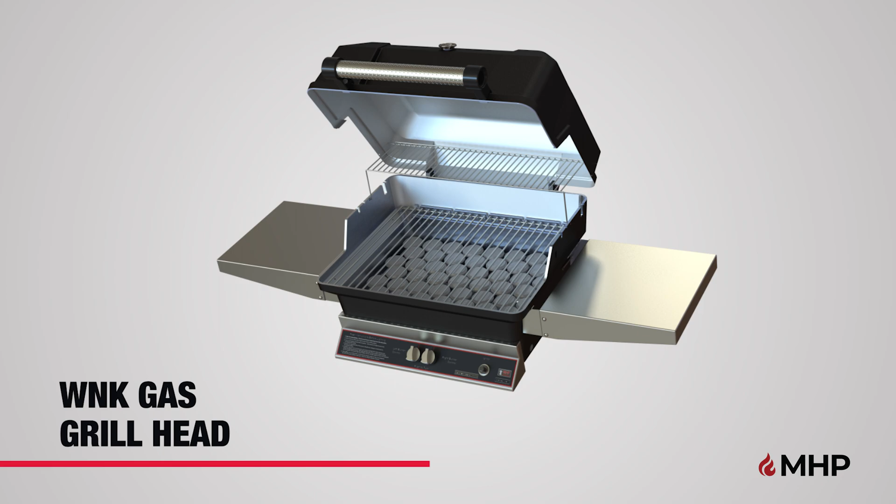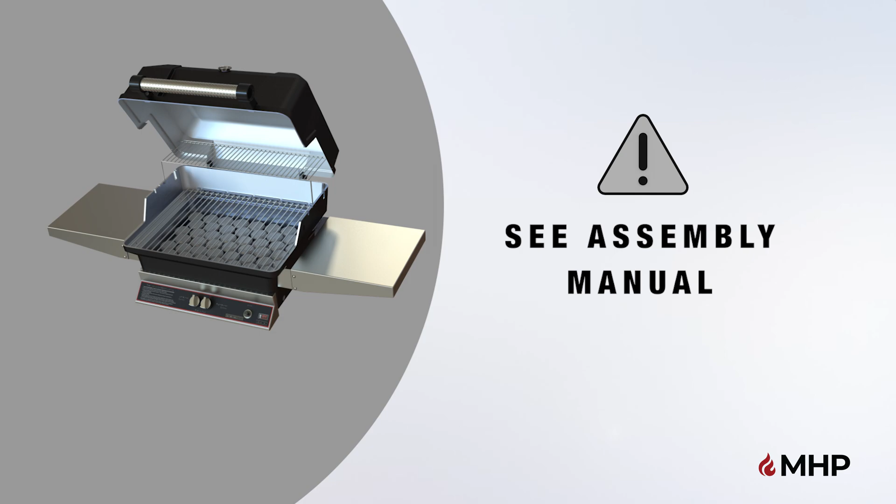Your new WNK Gas Grill comes with either stainless steel or SearMagic style cooking grids. Before you begin the installation, please make sure to read the assembly manual thoroughly, as it contains important safety warnings and assembly tips.

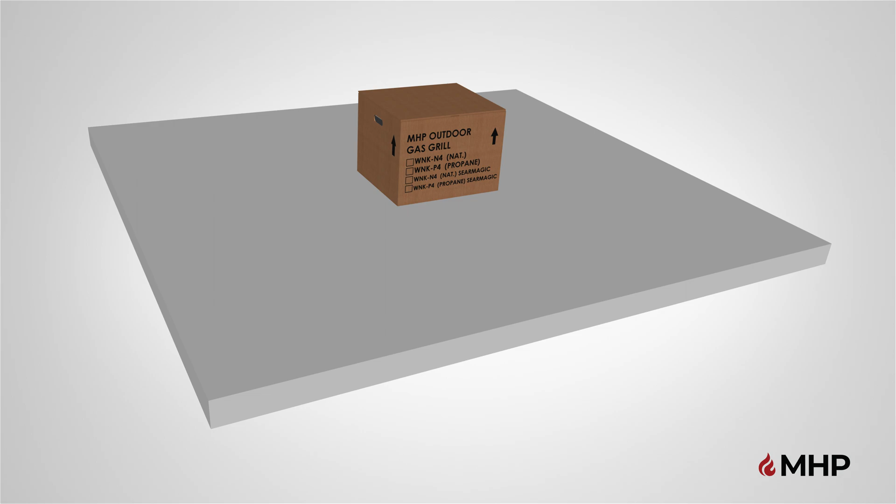Unboxing. Begin by selecting an area where you are going to set up your grill. Make sure there is enough room, and you have a flat surface. The appliance is for outdoor use only. It is not to be used inside a garage, other building, or any type of enclosed area.

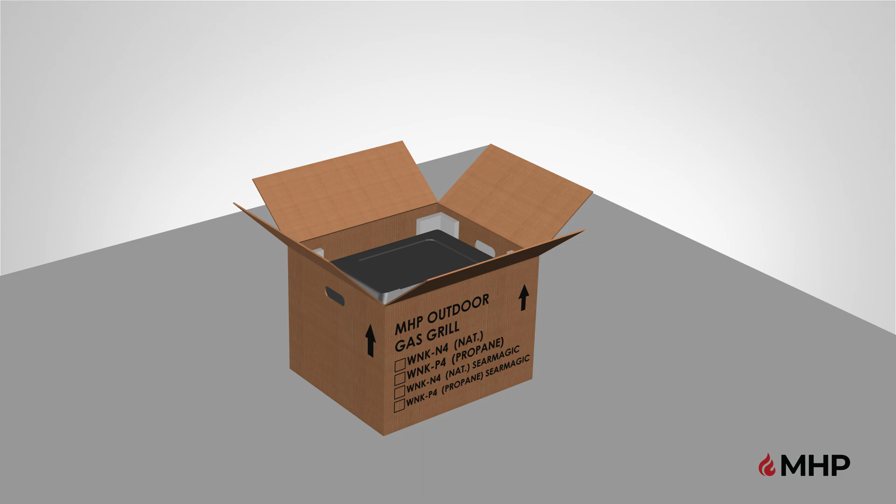With some assistance, place the WNK box facing out. Next, remove the packaging material followed by the grill head components. Slowly remove and set the components aside on a flat surface. Once all components are removed, you can discard the box.

Please note, combustible materials should never be within 18 inches of the bottom, back, or sides of your MHP grill when in use.

Unboxing is now complete. Step 1: Installing the control panel. For this step, you will require the following parts, and the following tools are recommended for this step.

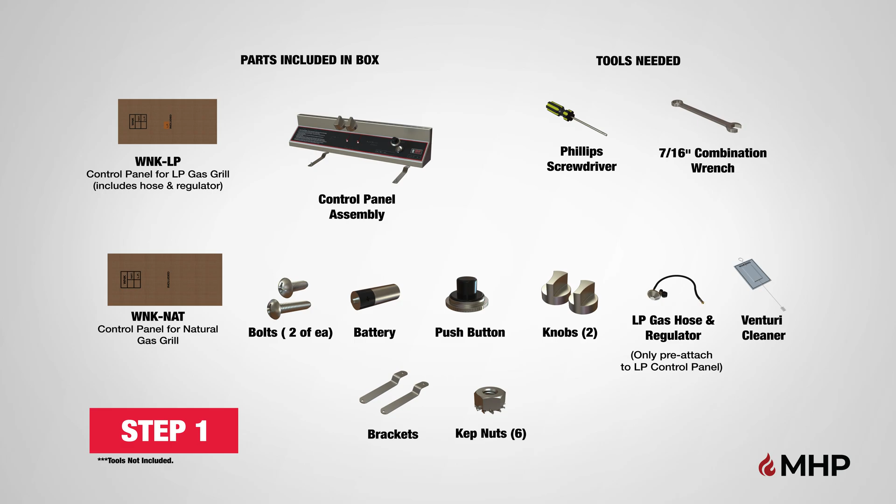Begin step 1 by locating the bottom grill casting, which has the burner pre-installed. Removing the burner is required before the grill casting can be installed on an in-ground or patio-based post. You may find that removing the burner will make it easier to mount the grill casting to the other mounting options, but it is not required.

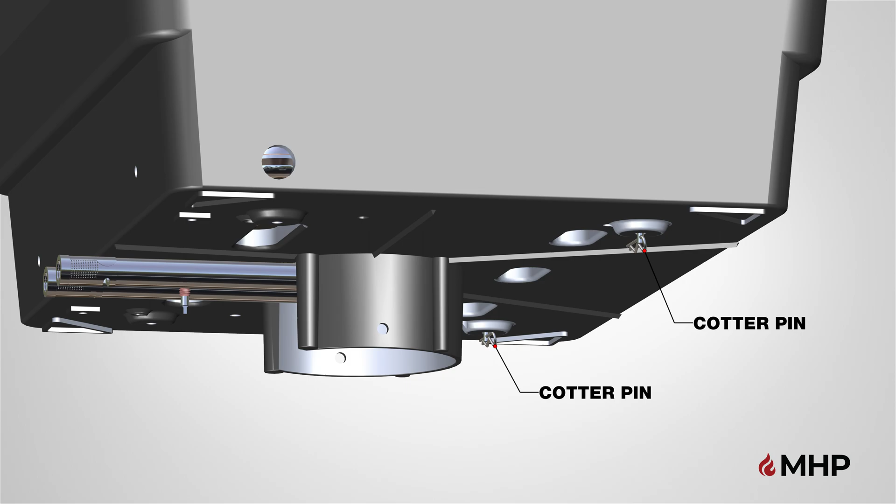To remove the grill burner, start by removing the two small cotter pins located on the underside of the bottom grill casting. Pull out the pins and place them aside for now. Next, pull the burner up and out of the grill head as shown.

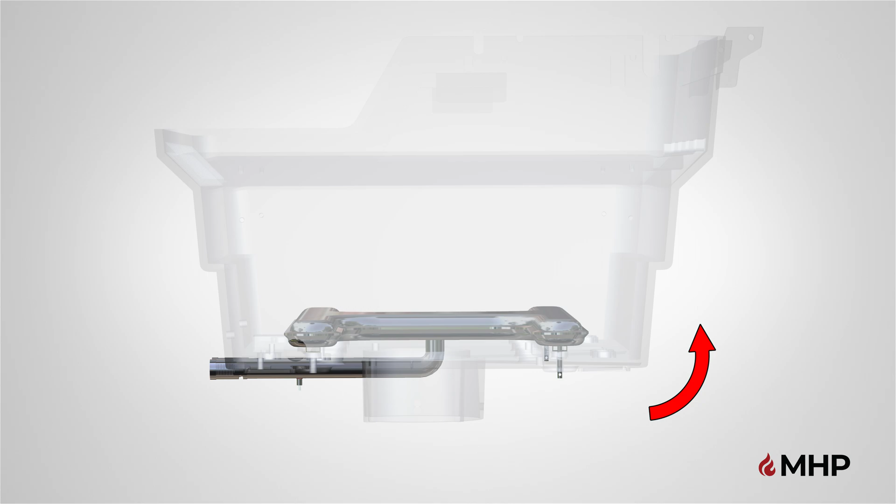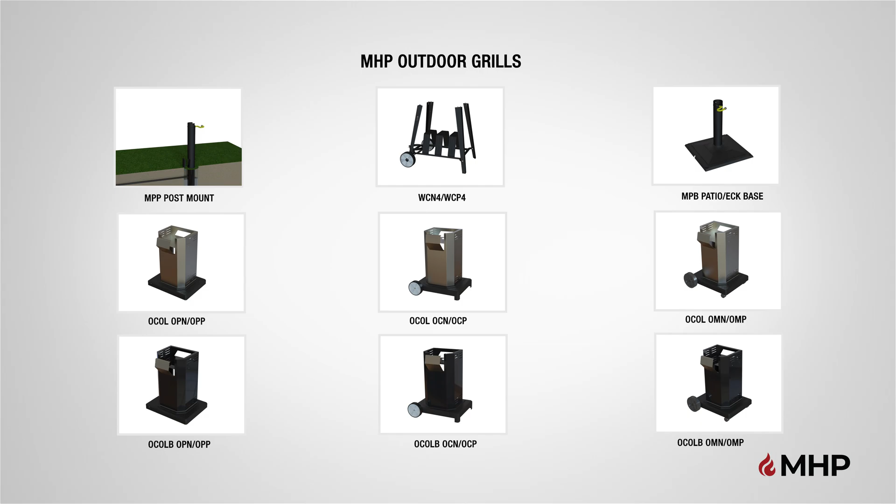After removing the burner, you may proceed to mounting the bottom grill casting to your selected grill base before installing the control panel. Please reference the assembly manual that came with your grill mounting for directions on how to mount the bottom grill casting, as well as how to properly connect the gas supply to your grill.

After mounting the bottom grill casting, locate the control panel and attach it to the front of the bottom grill casting. Please note that if your grill is configured for LP use, the hose and regulator have been factory installed onto the LP valve. Slowly push the control panel into place, matching the inner bolts of the control panel to the bottom grill casting holes.

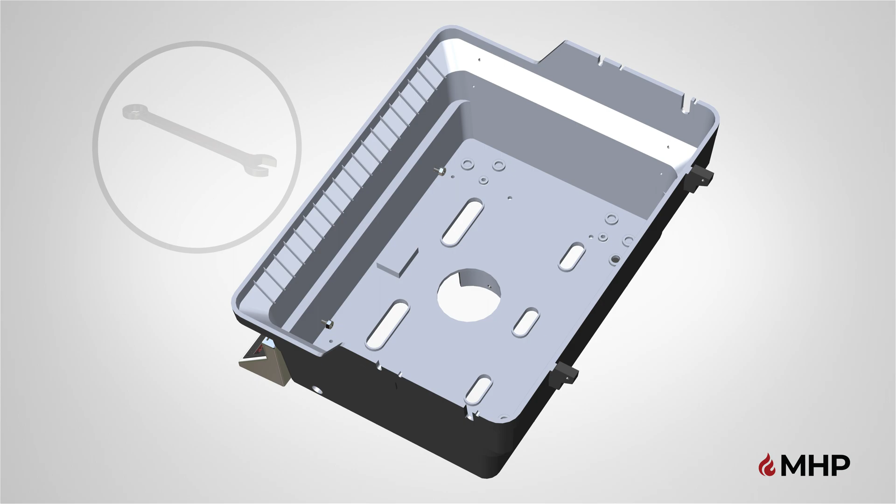Using two KEP nuts, secure the bolts through the inside of the bottom grill casting and hand tighten. Fully tighten the nuts using a 7/16" combination wrench.

Next, locate the bottom of the control panel and attach two support brackets. The support brackets attach to the control panel and to the bottom grill casting. The two front holes use a 1/4 by 20 by 1/2 inch Phillips head bolts, and the two back holes use a 1/4 by 20 by 1 1/4 inch Phillips head bolts.

Push the brackets into place, and starting with the back holes, insert the 1/4 by 20 by 1 1/4 inch Phillips head bolts through the grill bottom casting from the inside. From underneath, hand tighten the two KEP nuts onto the bolts.

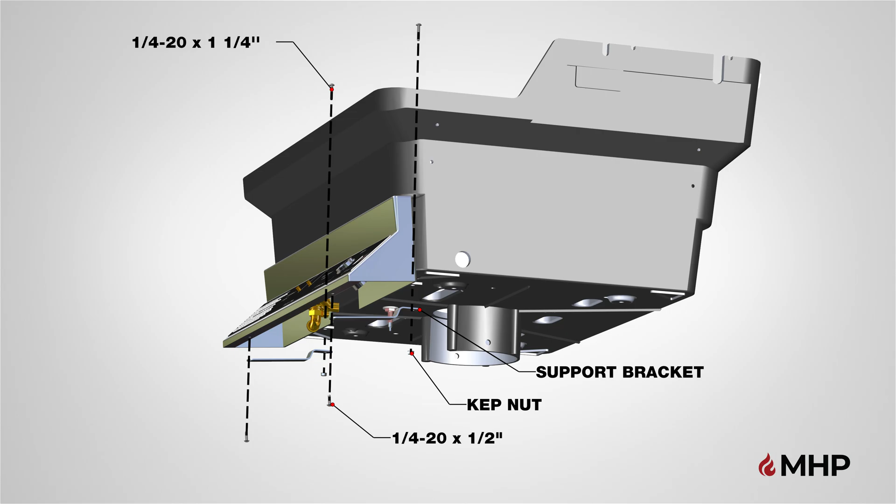Fully tighten the nuts onto the bolts using a 7/16" combination wrench and screwdriver. The screwdriver is used to hold the bolt head and the combination wrench to tighten the KEP nut.

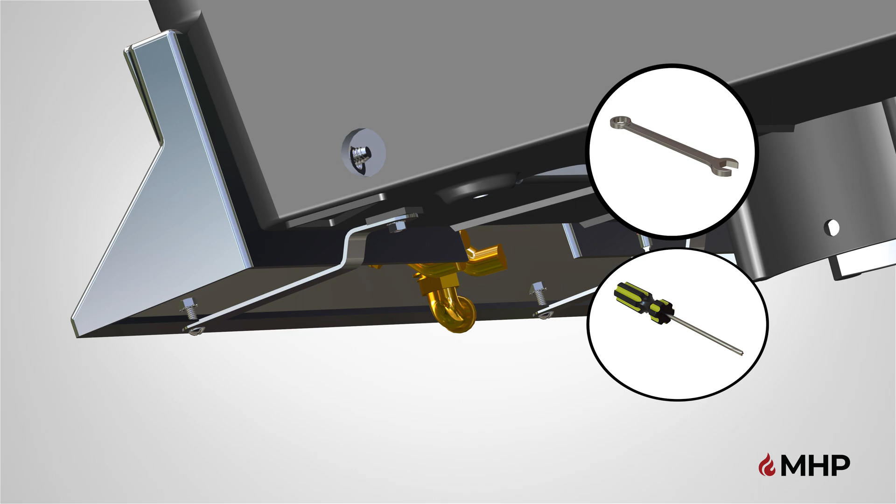After the back bolts are secure, proceed to securing the two front bolts by hand tightening the two KEP nuts onto the front bolts from underneath. Fully tighten the nuts onto the bolts using a 7/16" combination wrench and screwdriver. Again, the screwdriver is used to hold the bolt head and the combination wrench to tighten the KEP nut.

Next, locate the burner, and drop the burner into the bottom of the grill casting, making sure the venturi tubes go through the bottom opening. Slowly guide the burner and venturi tubes into place, making sure the back leg pins go through the pre-drilled holes in the back of the bottom grill casting.

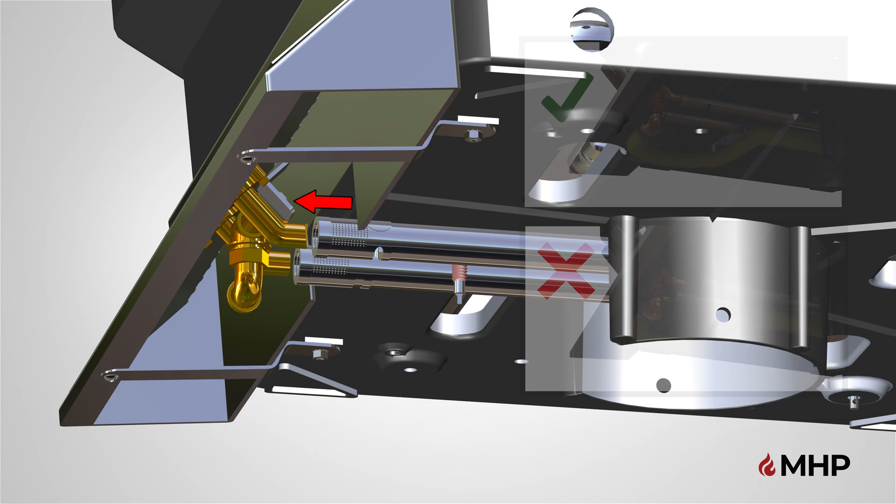Make certain the valve stems located under the control correctly engage into the burner's venturi tubes. When properly installed, the valve orifice should fit into the venturi tubes between 1/4 to 3/8 inch.

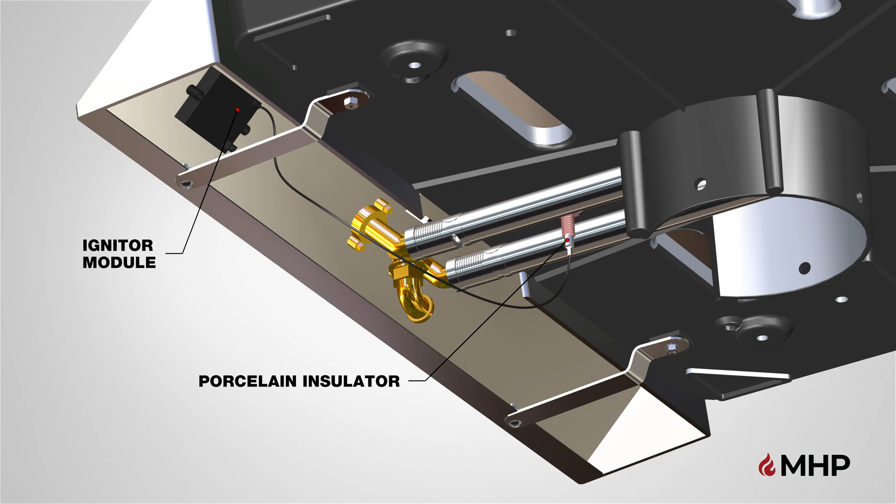Once the burner is in place, reattach the small cotter pins onto the burner leg pins underneath the bottom grill casting. When the burner is properly installed, proceed by attaching the igniter wire connection.

Attach the wire from the igniter module, located behind the control panel, to the porcelain insulator found on the underside of the bottom casting between the venturi tubes. Be careful not to crack the delicate porcelain insulator when attaching the wire.

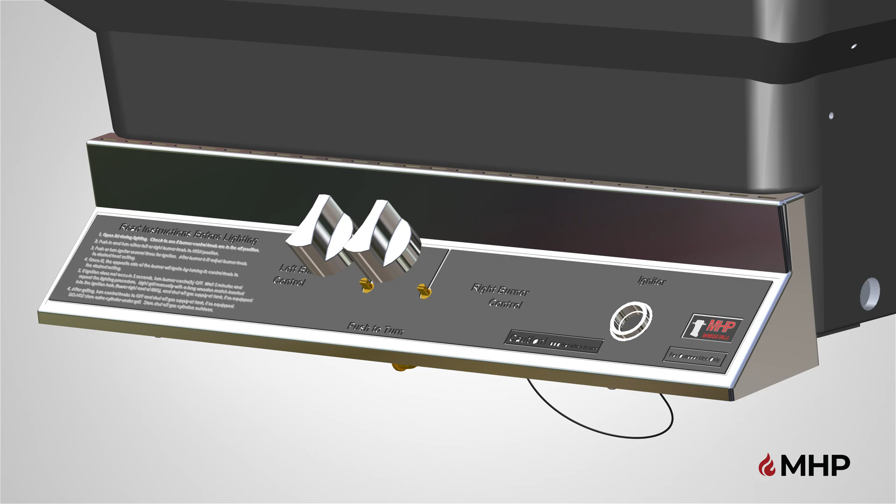Next, locate the control knobs, and attach the knobs to the control panel. Attach the two control knobs to the grill by pushing them down securely onto each of the valve stems.

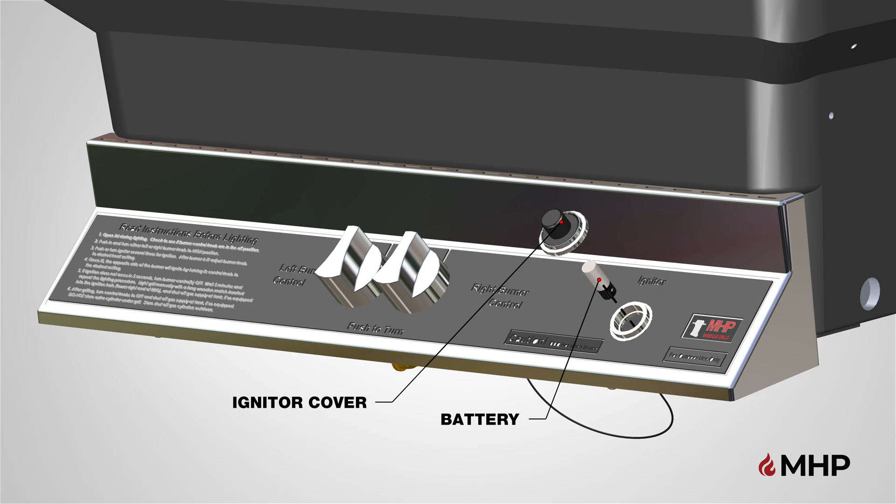Finally, place the AAA battery, with the positive side facing down, into the igniter module. When the battery is installed, attach the push button over the battery and turn clockwise to tighten in place.

Step 1 is now complete.

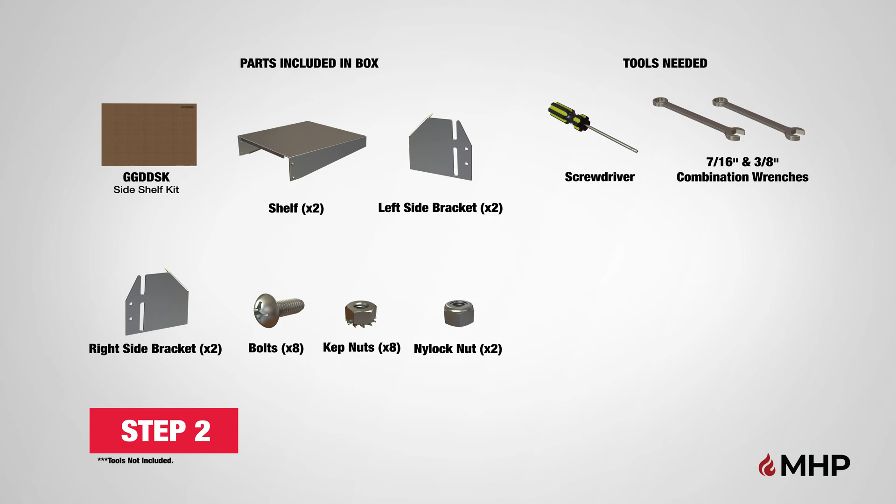Begin step 2 by first removing the plastic protective sticker from all sides of the shelf and shelf brackets.

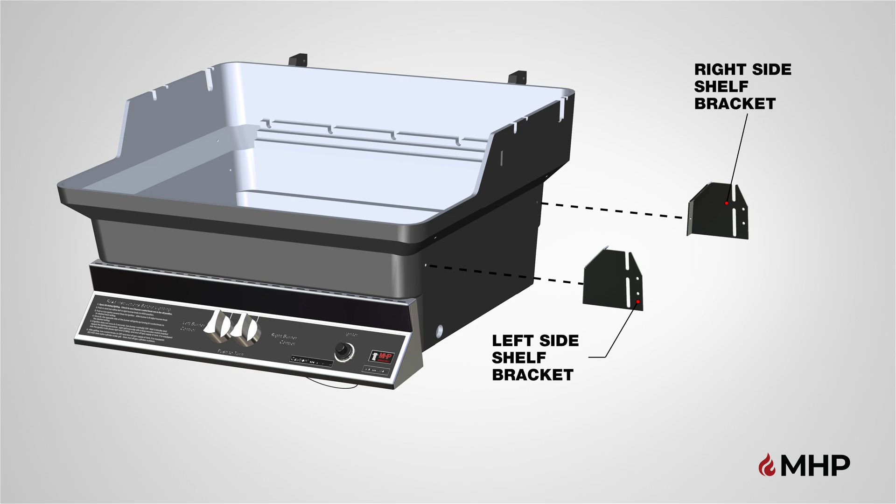Next, mount the two side shelf brackets to either side of your grill. Make sure to place the left and right side shelf brackets in the position shown. Mount the brackets in place, matching the side holes of the bottom grill head.

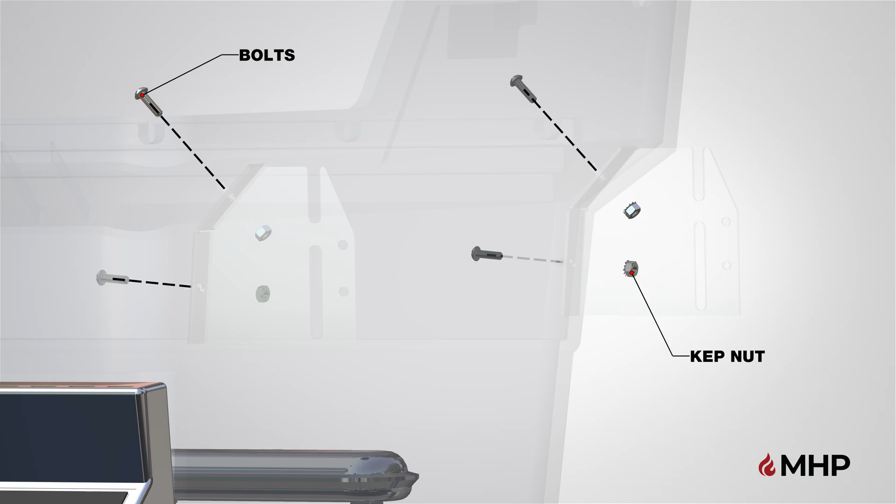2 round head bolts and 2 Kep nuts are used for each bracket. Insert the Phillips head bolts into the pre-drilled holes from the inside of the bottom casting, and attach the Kep nuts on the outside and hand tighten.

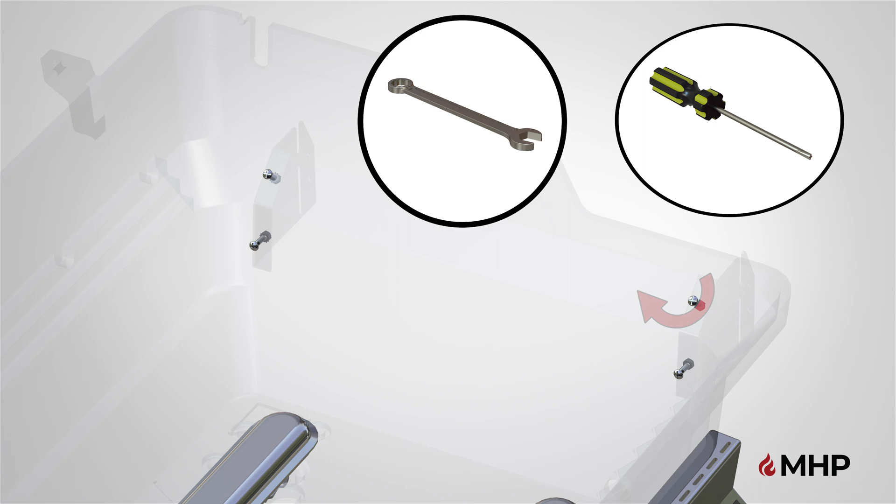Fully tighten the Kep nuts using a 7/16 inch combination wrench and screwdriver. The screwdriver is used to hold the bolt head and the combination wrench to tighten the Kep nut. While tightening, make sure the brackets remain parallel with the grill.

Once both brackets are fully secured, it's time to attach the side shelf. Gently spread the shelf apart and slowly push it over the side shelf brackets while inserting the pre-installed bolts into the slots in each bracket.

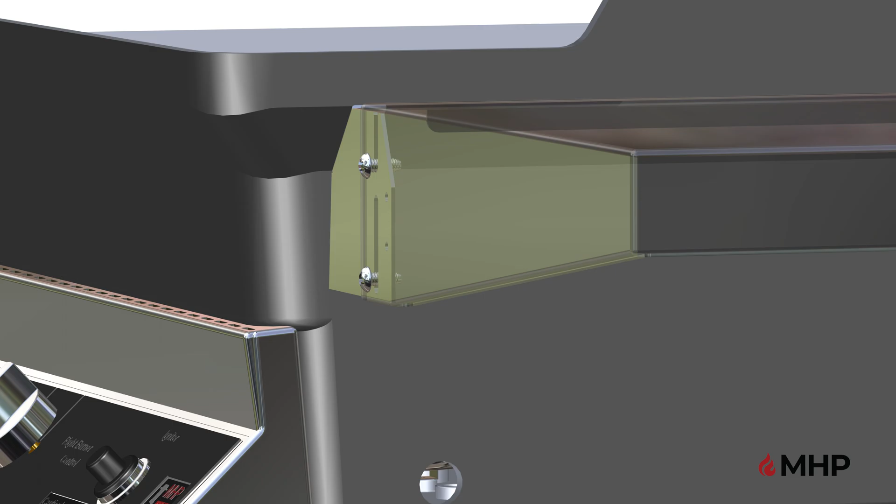Once both bolts are in place, tighten the nylock nuts on the bottom threaded screws using a screwdriver and a 3/8 inch combination wrench.

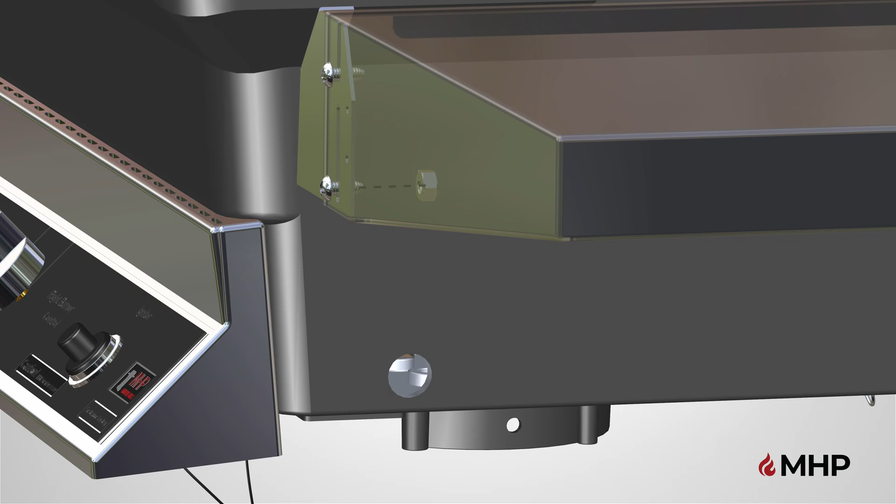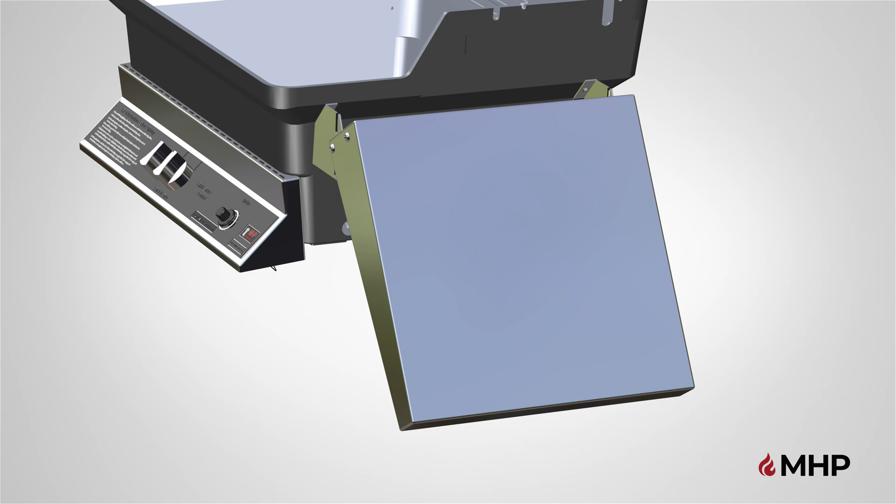Make sure the nylock nuts are snug but do not restrict movement of folding and unfolding of the shelf. To fold the shelf, simply lift it up until the top bolts slide off, and you can swing the shelf down. To unfold the shelf, swing it up and slide it back down in place.

After fully attaching the right shelf, repeat these steps and fully attach the left shelf.

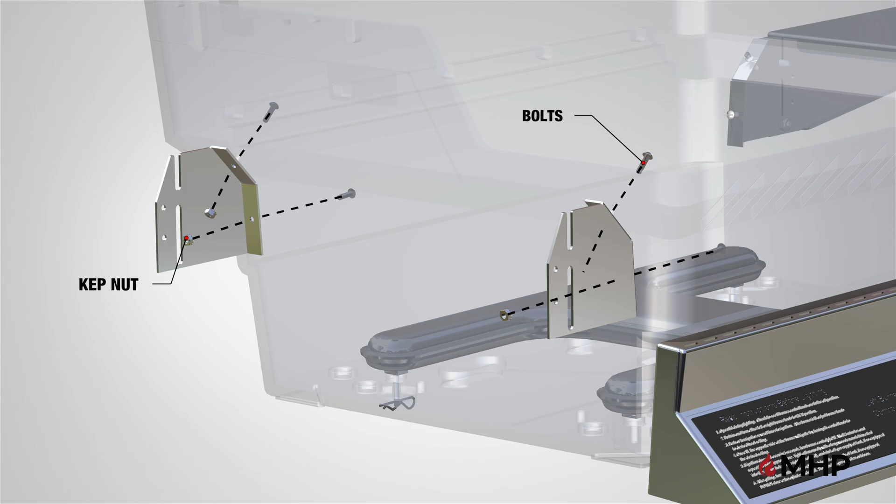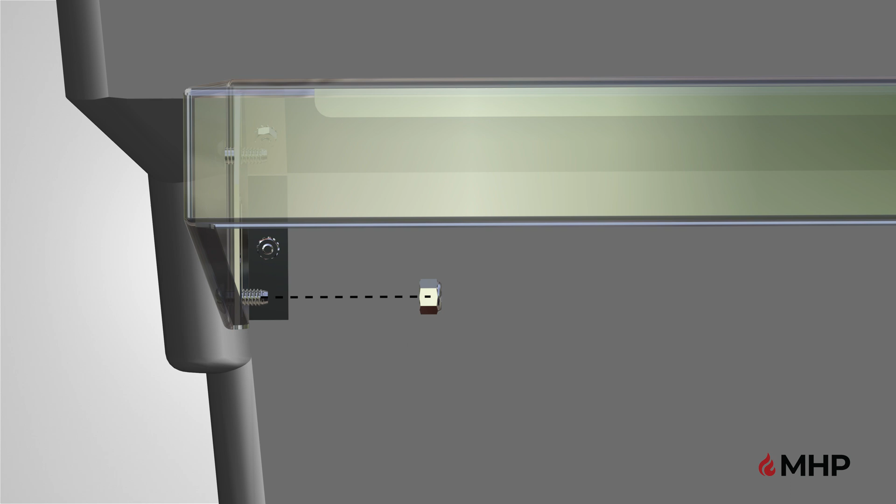Step 2 is now complete.

Step 3, installing the briquette grate. For this step, you will require the following parts.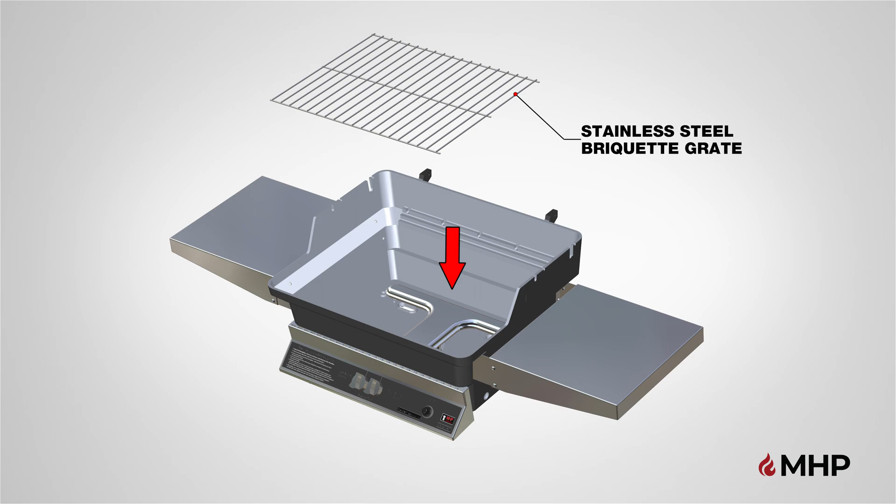Begin step 3 by locating the stainless steel briquette grate. Slowly lower the briquette grate into the bottom grill casting. The grate should rest level on the shelf edge, just above the burner.

Step 3 is now complete.

Step 4, installing the briquettes. For this step, you will require the following parts.

Begin step 4 by placing one porcelain briquette on the far corner of the grill. Place the briquette on top of the grate. Continue placing one briquette at a time.

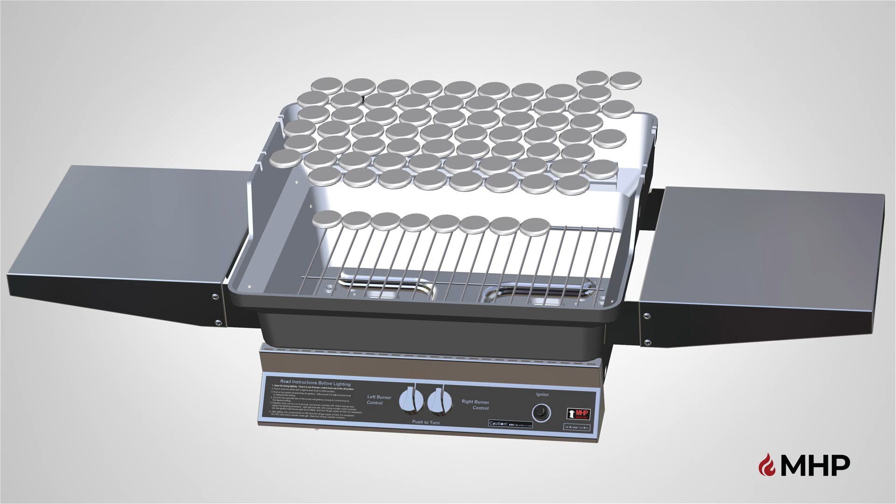Carefully place the porcelain briquettes on the grate in the pattern shown, making sure to only have one layer. This pattern helps to distribute heat evenly and reduce flare-ups.

The bag includes 67 briquettes. You will need all 67 to fill the briquette grate properly. Step 4 is now complete.

Step 5, attaching the top casting. For this step, you will require the following parts.

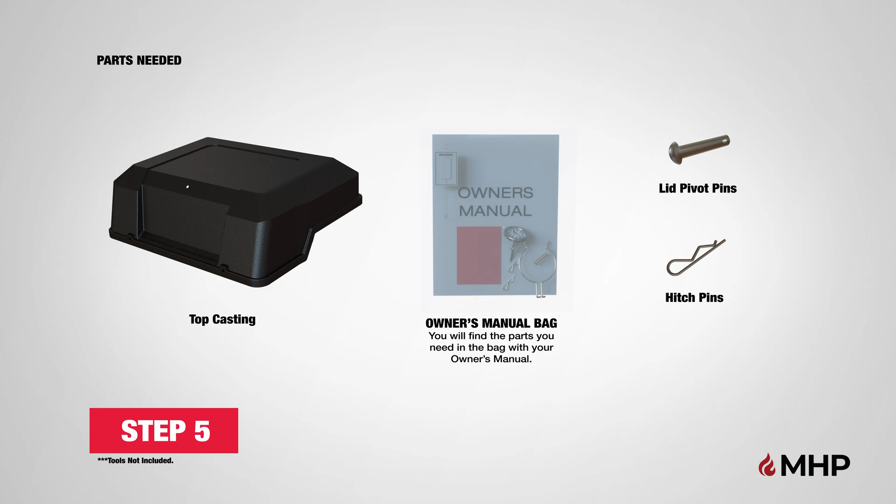Begin step 5 by locating the top casting for your grill. Place the top casting on the back of the bottom casting and align the pre-drilled holes in the top casting with the 2 pre-drilled holes in the back hinges on the bottom casting.

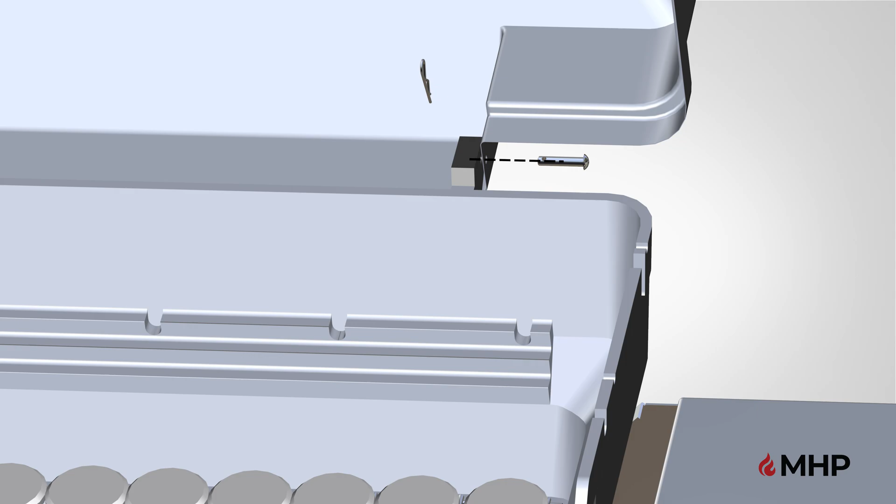To attach the top casting, you will require the 2 lid pivot pins and 2 hitch pins, one for each hinge. Once the top casting is in place, slide the lid pivot pin through both hinge holes on the top and bottom castings and secure with a hitch pin.

Repeat these steps for the opposite side.

Step 5 is now complete. Step 6, attaching the front handle.

For this step, you will require the following parts, and the following tools are recommended for this step too: 7/16" combination wrenches.

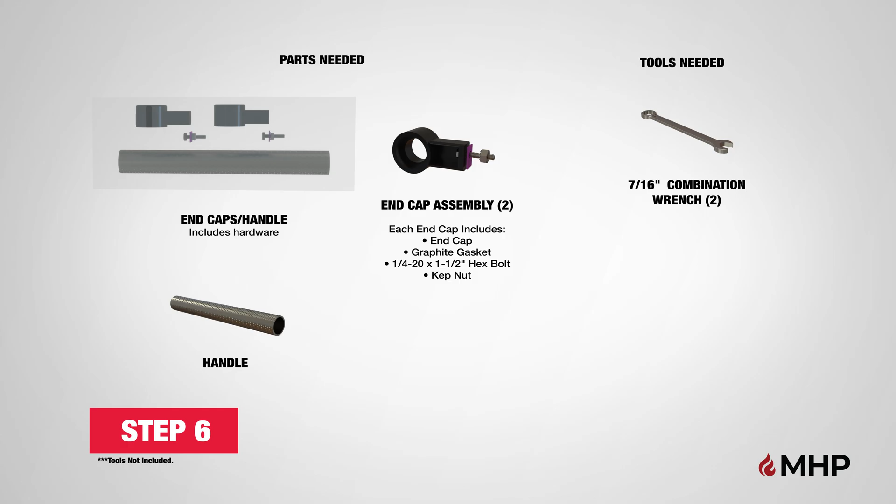Begin step 6 by maintaining the top casting lid open. Place the Stay Cool stainless steel handle and end caps to the outside of the grill and the nuts on the inside. To attach the handle,

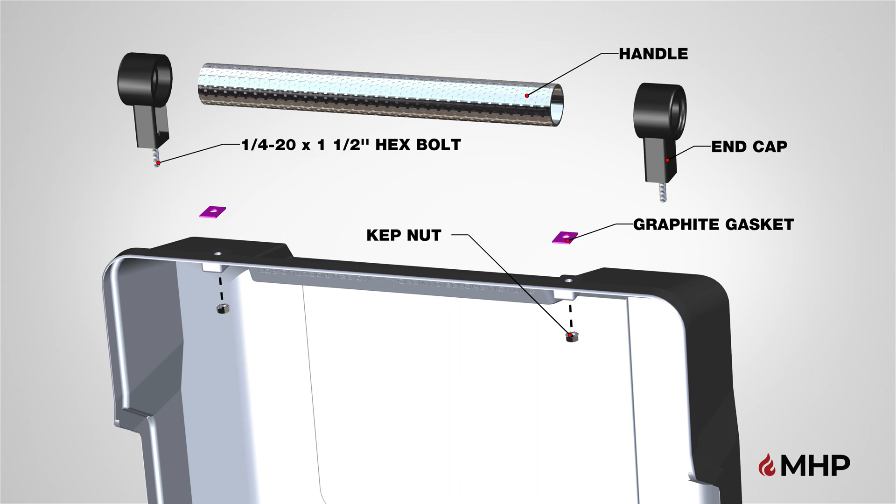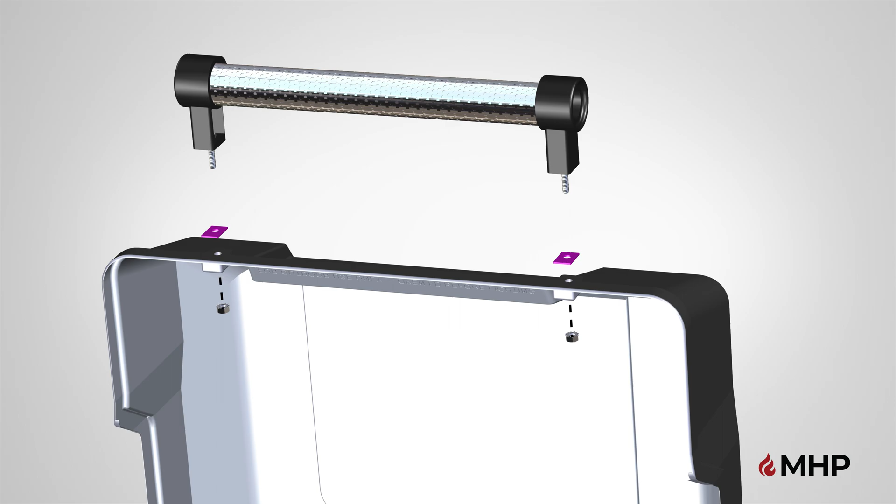Start by first sliding one end cap onto each end of the Stay Cool stainless steel handle. Next, secure the end caps onto the top casting using 1 hex bolt per end cap. Make sure that the graphite gasket is positioned between the end cap and the grill lid, as shown.

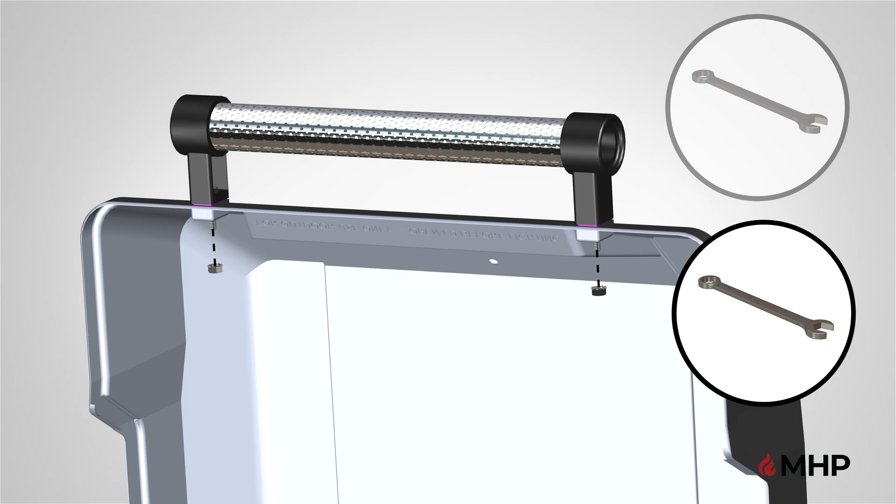Secure the bolts using 1 kep nut per bolt and hand tighten. Fully tighten the nuts using 2 7/16" combination wrenches, 1 to hold the bolt head and 1 to tighten the kep nut. Step 6 is now complete.

Step 7, installing the temperature gauge. For this step, you will require the following parts. Begin step 7 by locating the temperature gauge assembly.

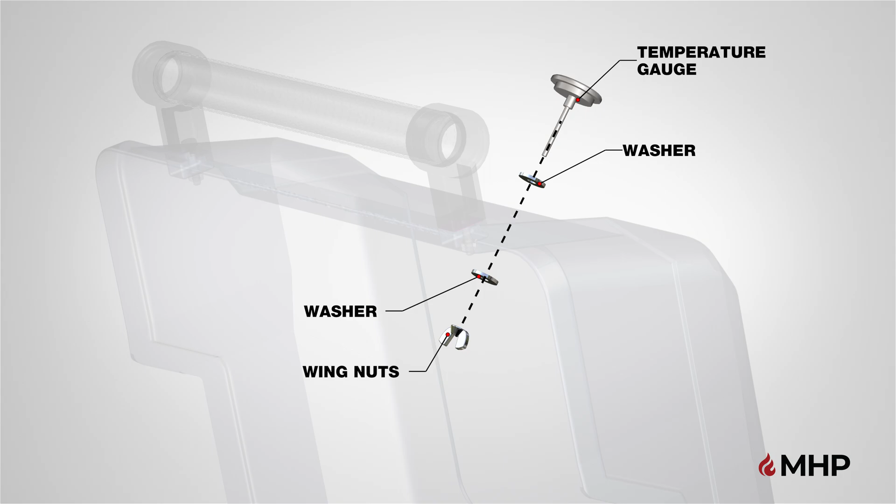Insert the temperature gauge through one washer into the pre-drilled hole located on the outside of the grill top casting. Make sure the gauge is facing outward. On the inside of the grill lid, install the second washer, then the wing nut to the temperature gauge post. Hand tighten the wing nut until the temperature gauge is snug against the casting.

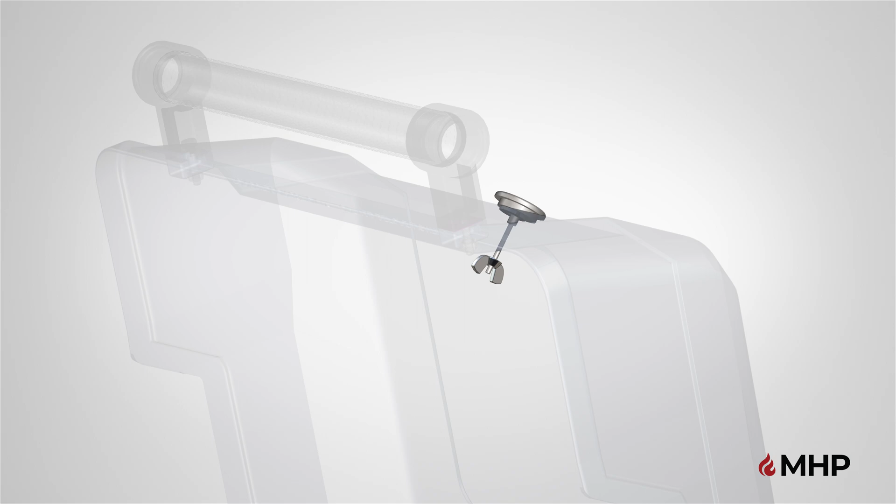Step 7 is now complete. Step 8, adding the stainless steel or SearMagic cooking grids. For this step, you will require the following parts. The WNK grill is sold with either the stainless steel cooking grids or SearMagic cooking grids.

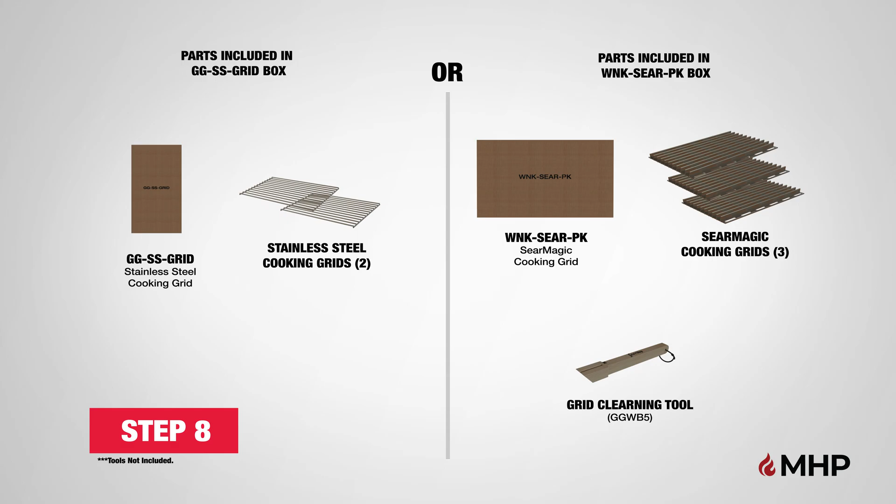Insert the 2 stainless steel cooking grids by placing them on the top ridge on the inside of the grill. The 2 stainless steel cooking grids should easily drop in side by side above both the briquette grate and porcelain briquettes. The top side of the stainless steel cooking grids has the rods on top of the frame. Set the grids into place.

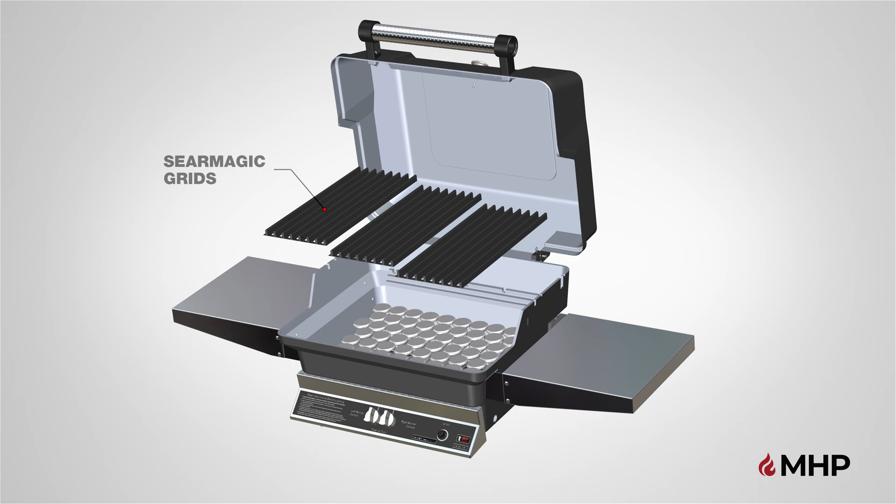If your grill came with the SearMagic cooking grids, place 3 SearMagic cooking grids on the inside of the grill. The 3 SearMagic cooking grids should easily drop in side by side above both the briquette grate and porcelain briquettes. The SearMagic grids are reversible. Use the ribbed side for making sear marks on steaks, and use the smooth side for more delicate items.

Step 8 is now complete. Step 9, adding the warming rack. For this step, you will require the following parts.

Begin step 9 by locating the warming rack and placing it on the inside of the grill assembly. The swing-away warming rack attaches to both the grill lid and the grill bottom casting. Insert the stationary rods into the top right and left mounting holes located on the grill lid.

After inserting the stationary rods, flex the bottom swing rods to insert into the bottom right and left mounting holes located in the bottom grill casting. Make sure it fully attaches to the top and bottom castings.

Congratulations! You have now completed the assembly of the WNK Gas Grill Head. You may now proceed to attaching the gas line. For complete steps on connecting your grill to a gas line, please refer to the instructions included in the assembly manual for your specific mounting.

Your new MHP grill comes configured for either natural or LP gas. It's important to verify that your grill is configured for the correct gas type before connecting the gas supply to your valve. You can verify the gas type by checking the tag located on the left end cap of the control panel on your grill.

If your grill has been set up for LP gas, your LP hose and regulator have been factory installed to your valve.

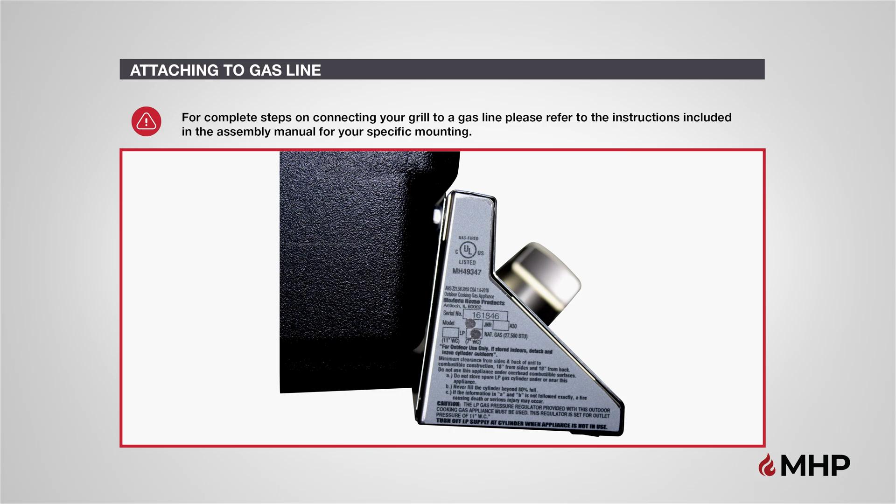Steps for connecting your grill to natural gas will depend on which base you have chosen to mount your grill head to. For complete steps on connecting your grill to a gas line, please refer to the instructions included in the assembly manual for your specific mounting.

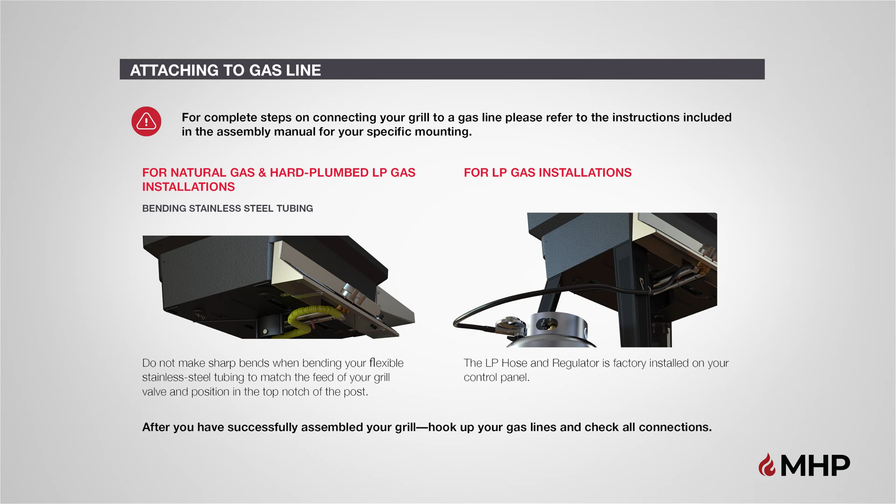Do not use your new grill until it has been fully assembled and inspected for correct performance in accordance with the assembly manual. Enjoy your new WNK Gas Grill Head.